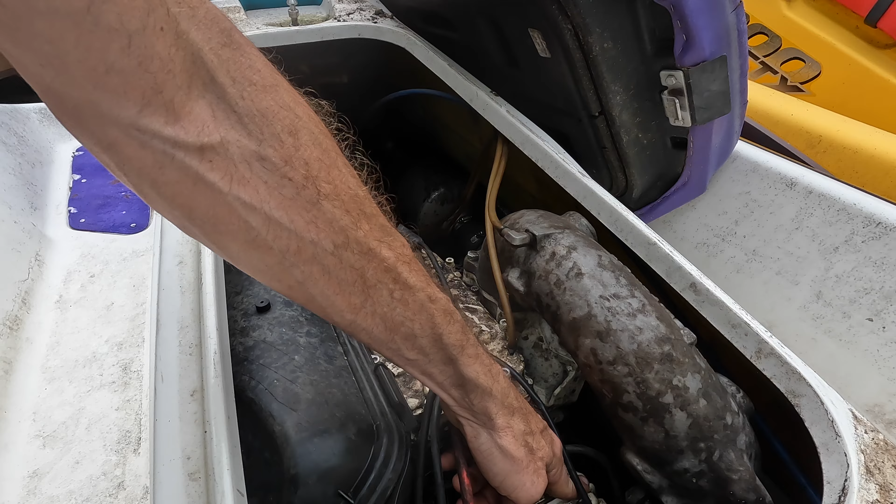From what I can tell, I just took this top off, and the person I bought it from said that there may be a stator issue, and they left this off. There are 8 screws or 8 bolts, which I found, which is good. This was taken off, and that's all the diagnosis that I believe has ever been done on this.

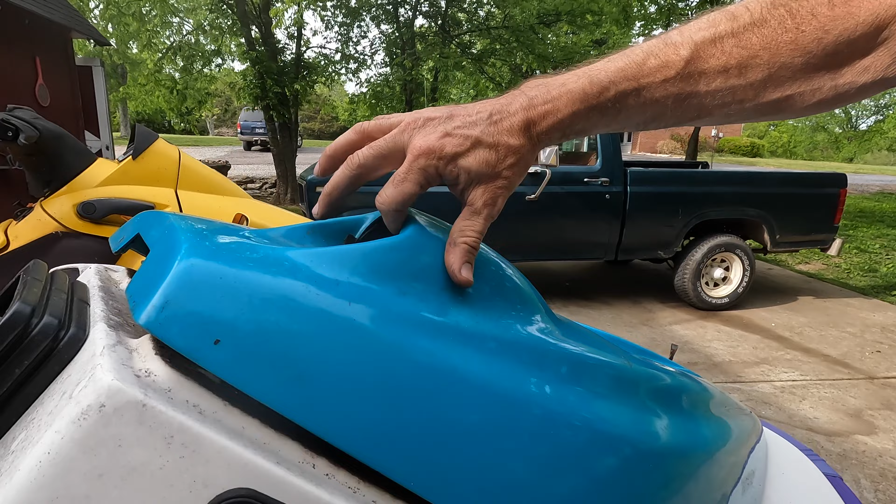But these look pretty rusted right here. I don't know if this top was left open and they rusted. Up here, I don't know what this is, but where you're missing the padding, this looks like the kill switch, the start switch, and this is stuck on there too. So it seems to be in kind of rough shape. There's the bolts, and these pads here, obviously pretty rough too. This is your oil fill on this one.

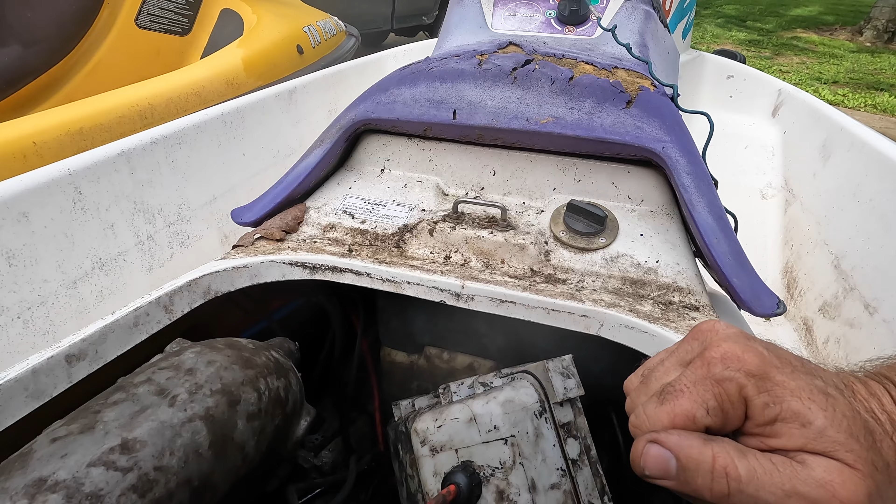So what I'm going to do is take a look at this carb for sure. But maybe I'll see if I can get a battery in here, at least turn it over. If I can get the engine turning over, I'll check out the oil lines, see how those look. They always seem to rot out.

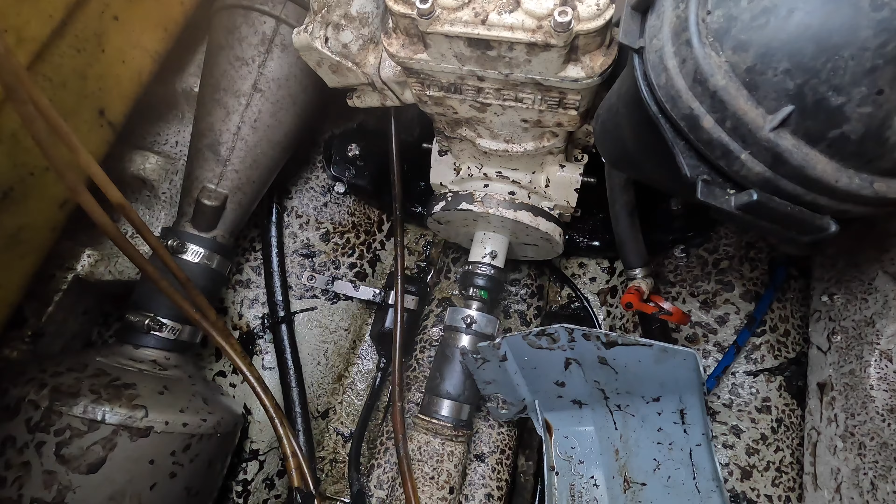Let's see if we can pull some of this out while we're looking at it. Where are the oil lines? It looks like fuel right there, looks like a fuel filter. That's not an oil line. I bet that's in one big oil line. Okay, so I think I need to take this carb out, yeah, see there's some oil lines going in there. I bet those need to be replaced. Almost guarantee it. Probably a good idea to do regardless.

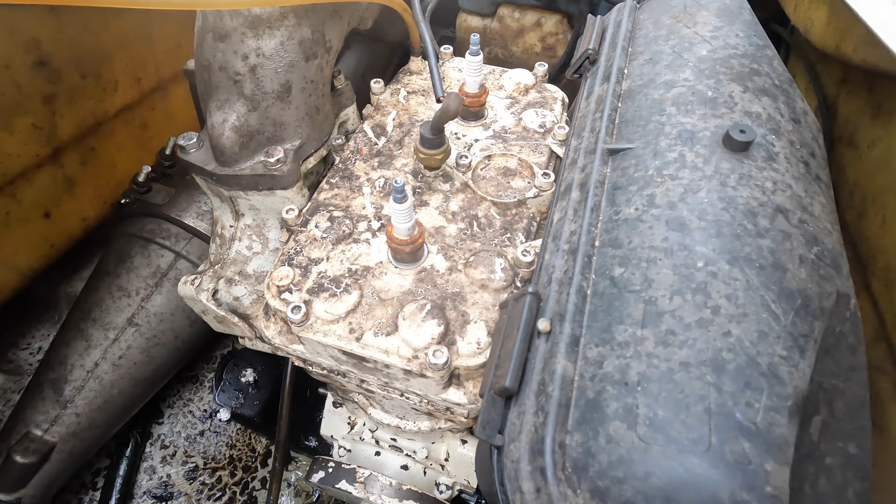All right, let's find a battery, throw it in here and see if we can get some action out of it. All right, I got a battery in here. I don't know where this electrical box is supposed to go though, it just sits in here or something. Anyway, for now I'm gonna leave this off.

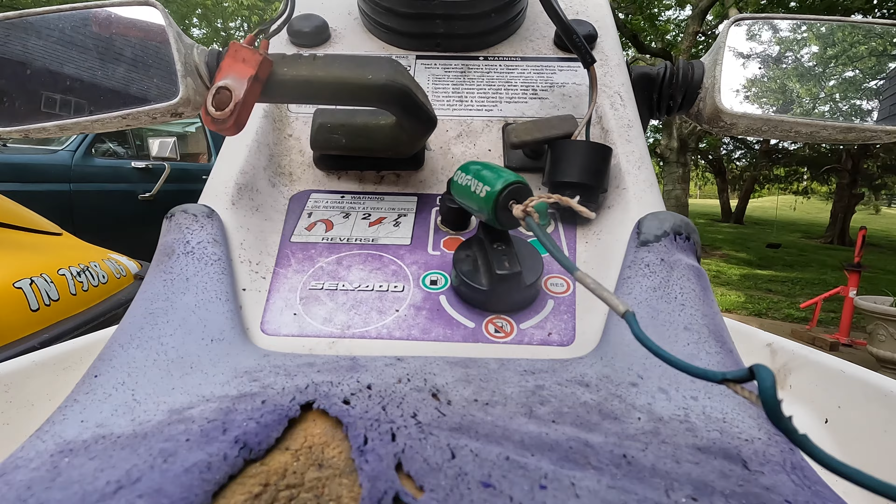Well, all right, let's see, we got a key in here. Let's see if we can turn this over. Do we have a key? Is this the key? Turn on reserve. Well, let's just leave it off, let's just hit that. Oh well, there we go. Oh yeah. Kablamo. Sweet. Guess we don't need no key.

All right, so now we just got to check for spark, see if it really is a stator issue, or if maybe we just need some spark plugs, or a fuse, or who knows.

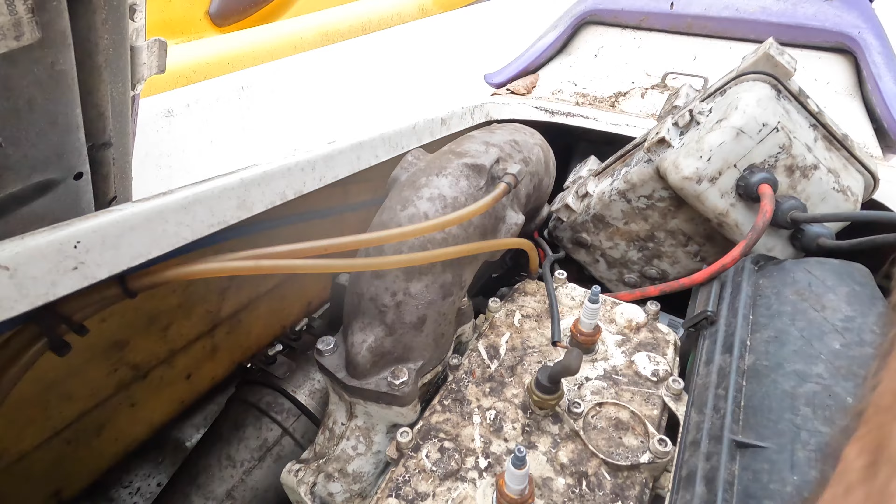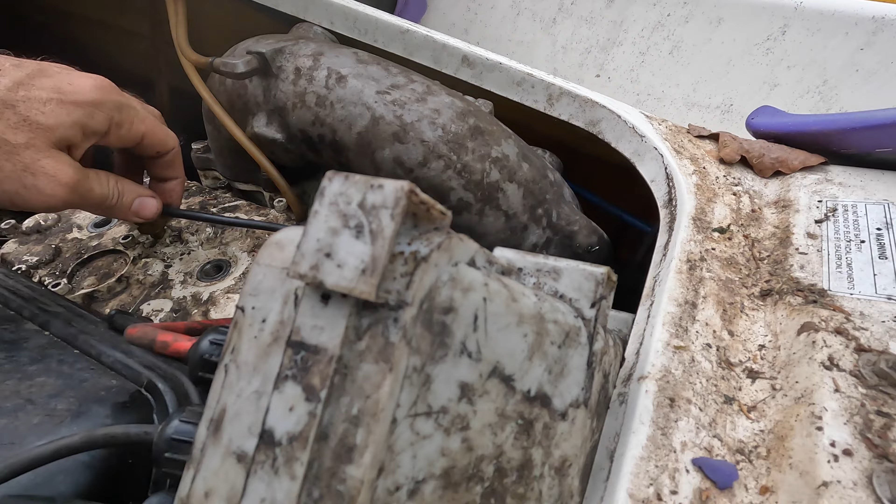Oh well, they don't look too bad. Let's do the old see-if-this-is-sparking trick. Getting any spark? I think I want to check a fuse before I check the stator.

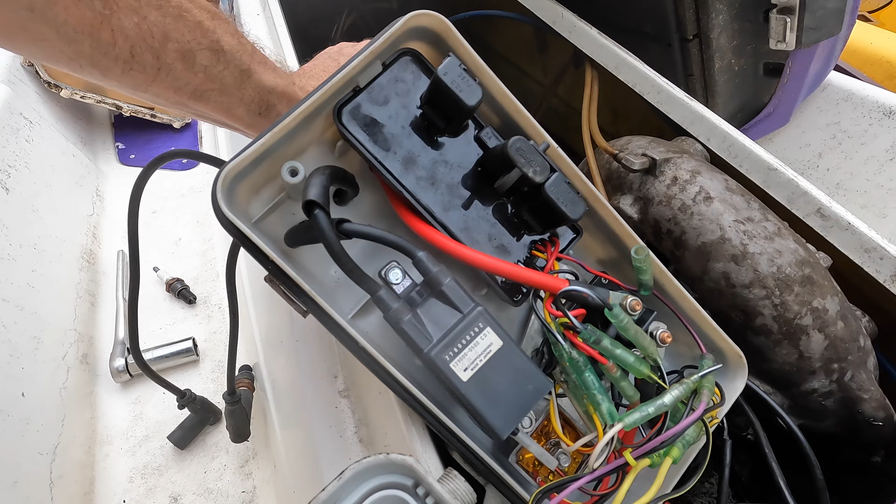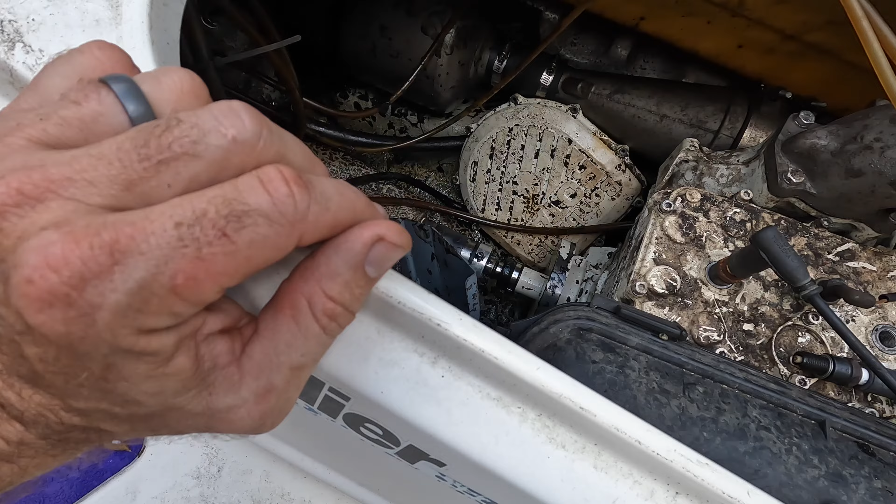I've checked these 2 main fuses and they both look fine, so I think the issue might be with the stator or the magneto. I'm going to see if I can get to it down here, maybe clean off the tips to it, but let's try to do that next.

I already have the cover off this compartment. That looks like somebody's been trying to loosen that nut right there. All right, let's get this battery out of here, let's see if we can loosen that nut.

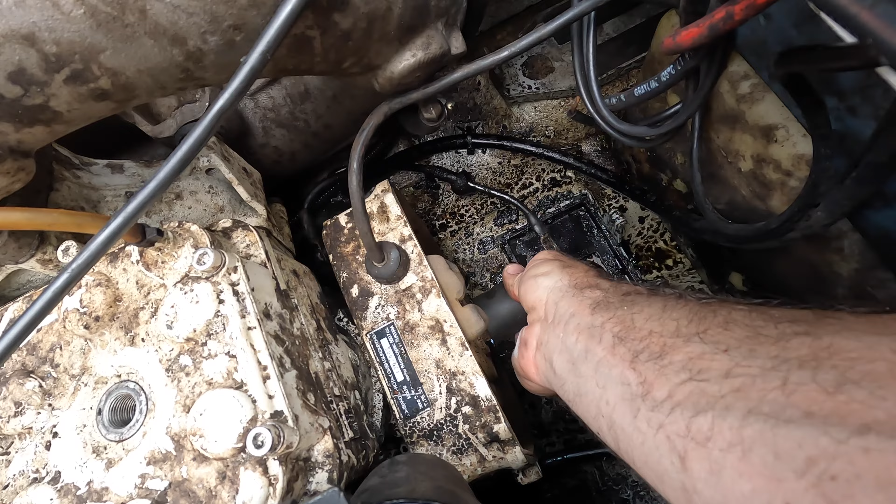I might have to hold the engine on this side. I believe they do make a special tool for getting that off, but I do not have that, so let's see what we can do. It's going to be a 30 millimeter socket.

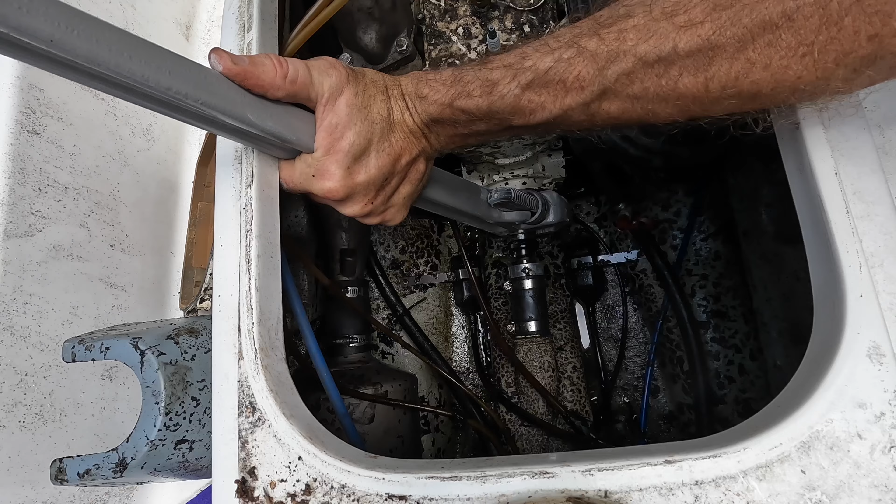Get this on here to hold it. I think I'm going to have to hold it this way without trying to damage this. All right, oh wait, it's grabbing now. Hold on, okay, it's grabbing. All right.

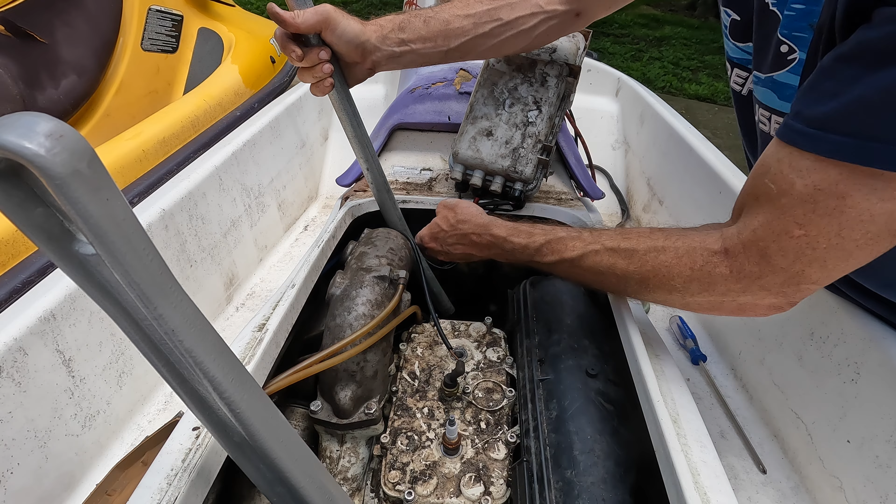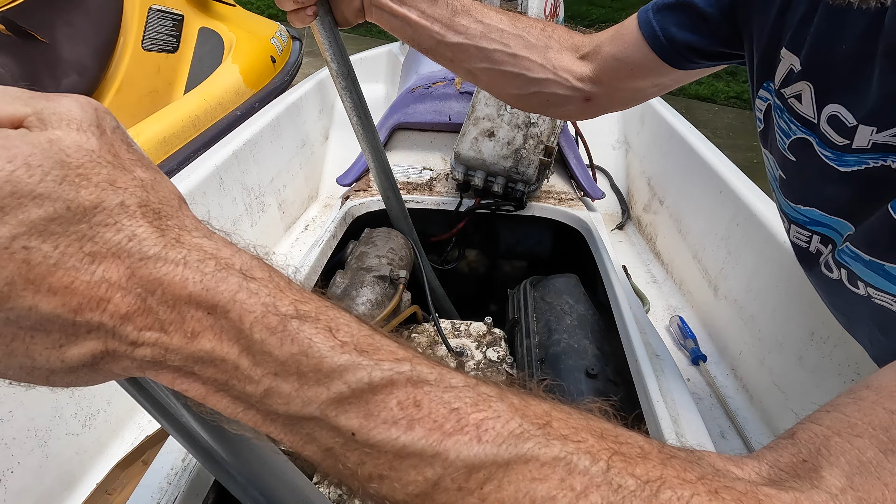All right, let's see if I can loosen this. Come on. Am I going the right way? That's the question, is it reverse threaded? Is it reverse threaded? I don't think it should be, right? Come on, I'm putting pretty good pressure on this. Maybe that'll help break some of the Loctite on there.

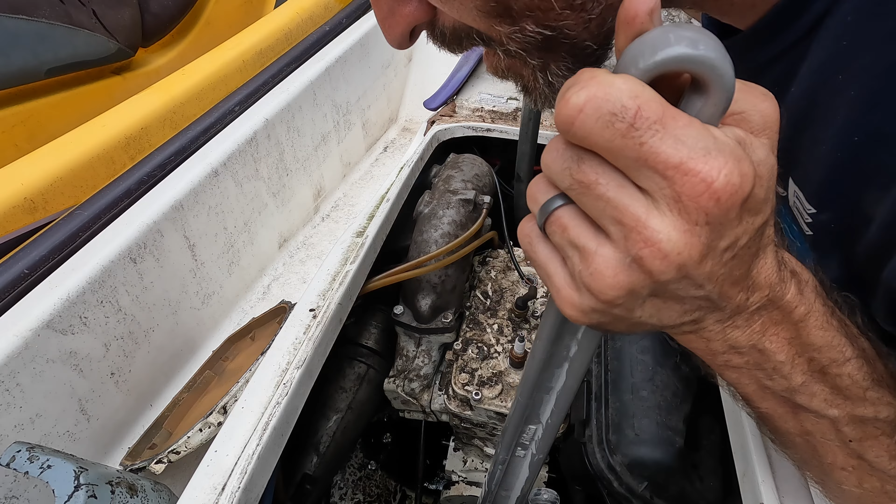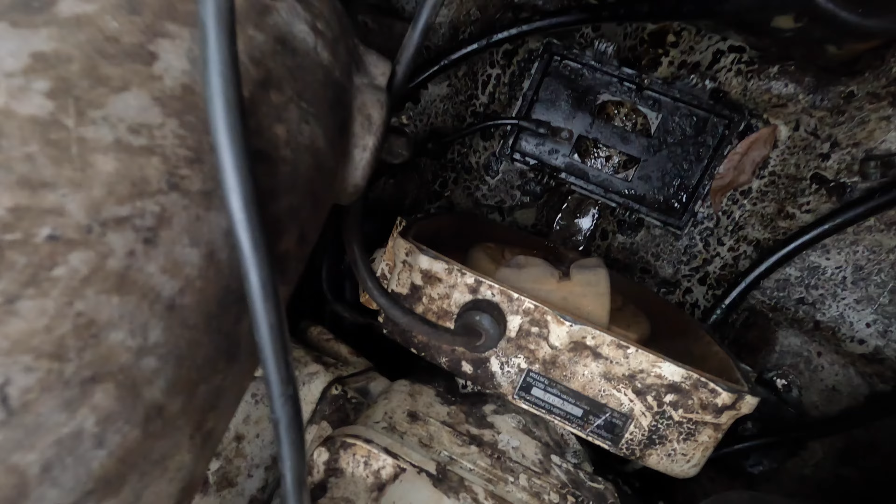All right, it's grabbing. Oh, I got it, I think. Yes. Did it. Oh, it's hot still. All right, okay. That's not the hardest part though, I still think we got to pop that off somehow.

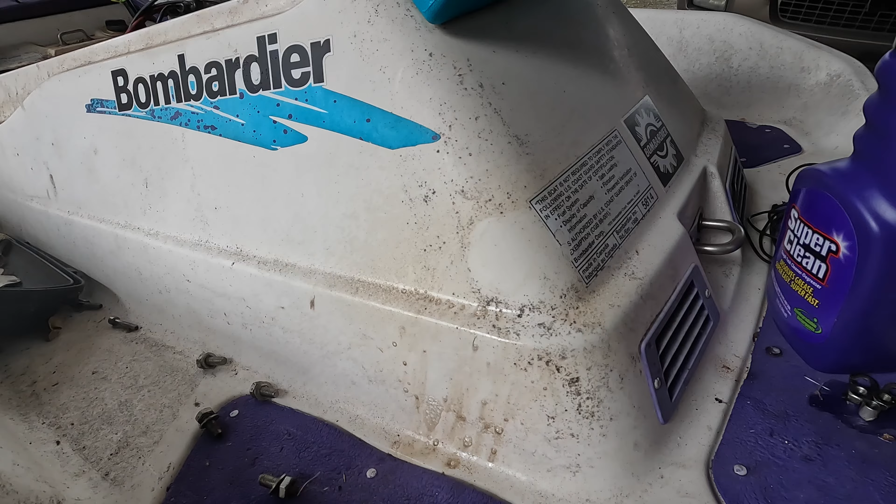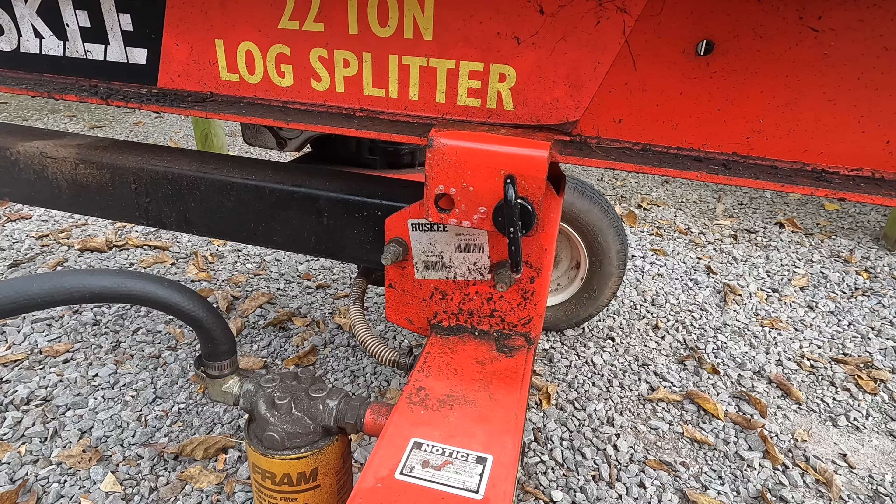Let's find something dirty to try this out with. Let's try this on this mildew here. It makes quick work of that. Oh man, look at all this grease and grime here, doesn't seem to have a problem with that. On the back of the can, it shows brakes, grills, engines, tools, driveways, outdoor furniture, marine kitchens, bathrooms, stainless steel. I can do this on my stainless steel grill, maybe I'll give that a shot. Oh man, this grill is nasty.

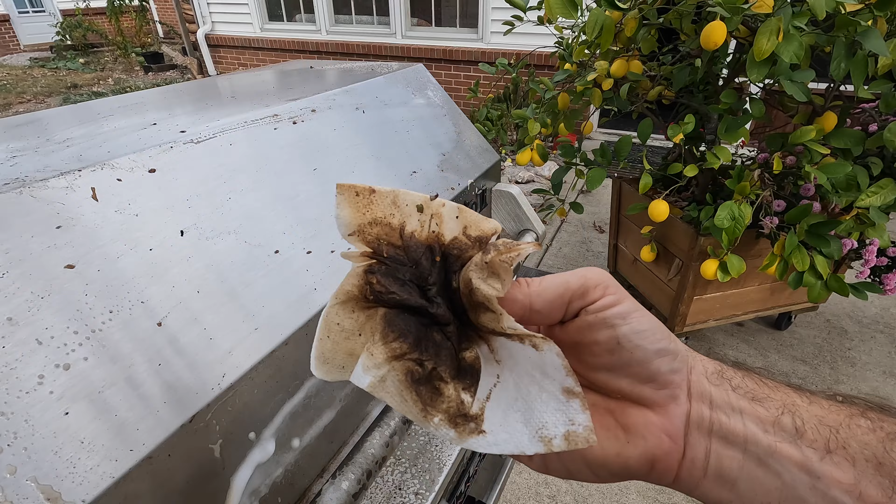I need to get more paper towels. That stuff's working pretty well.

That's really not a bad first pass. Some of this stuff is sap from the tree that I got to pick up, but I did a pretty good job for a real quick first pass.

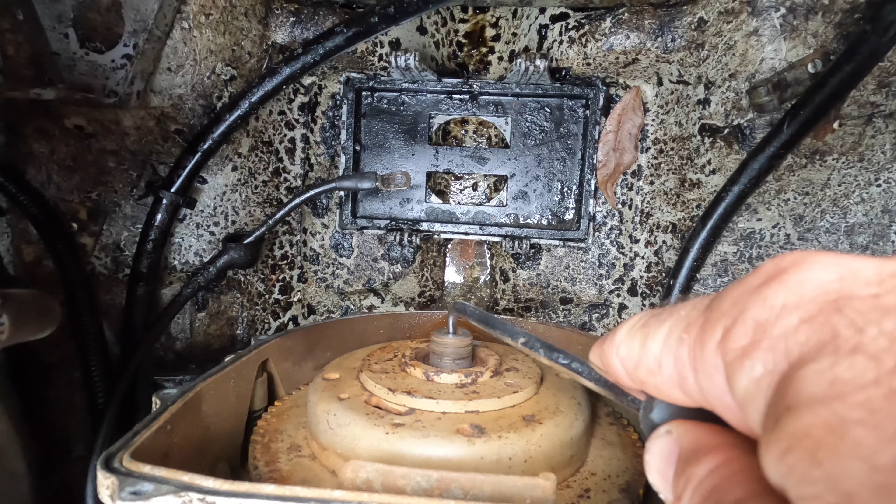Okay, I think in order to get this off, we need to punch this in here. Maybe it'll push this out. I think that's the way to do that.

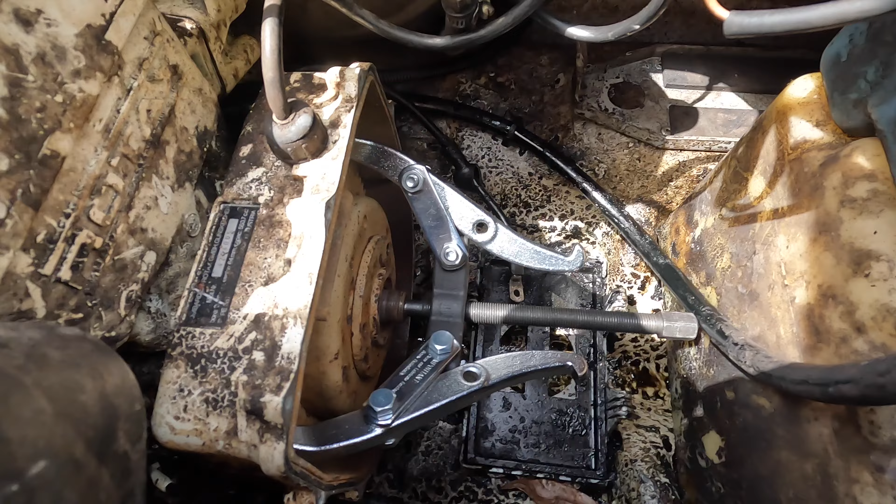I really don't want to take this engine out if I don't have to. So I rented this puller at O'Reilly's, and I was able to get 2 of the puller legs on this flywheel here. The third one, I can't get it on there. I'm hoping that'll give me enough grab to pull it out. Let's turn this and see if I can pull this off.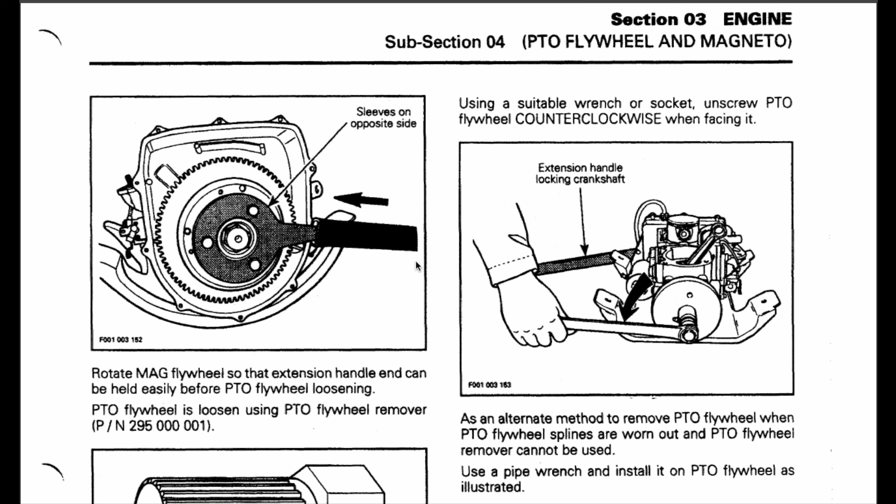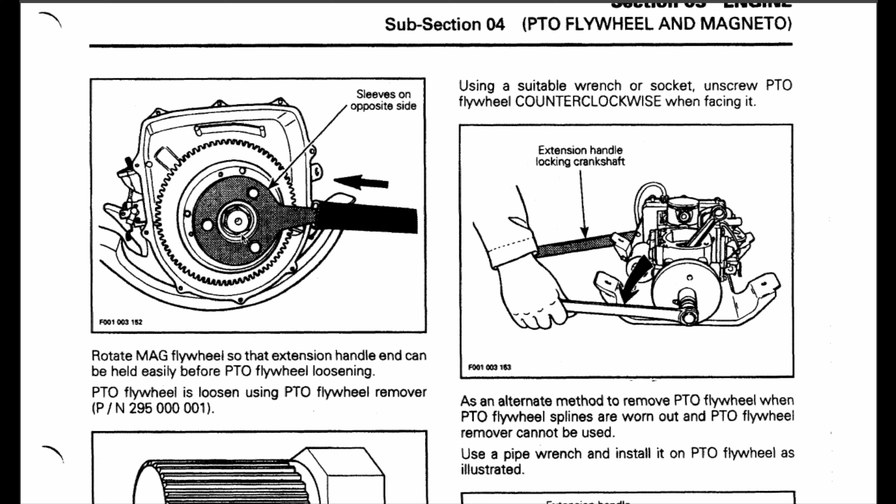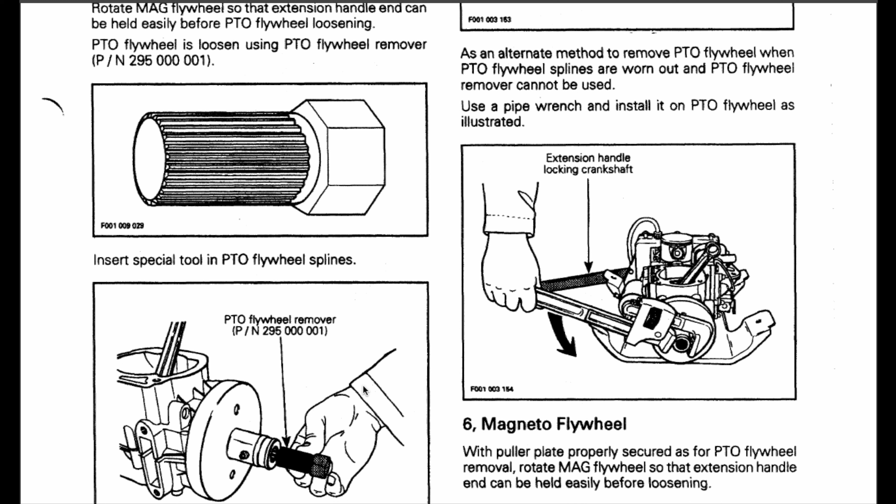The SeaDoo manual here is from 1994, so I think this is the right one. I'm looking at this page here. There's a special tool to attach to the flywheel, which holds it in place, and then there's another special tool which you put on the other side of the flywheel. This is the back side of the engine to basically lock it so that you can unbolt the nut.

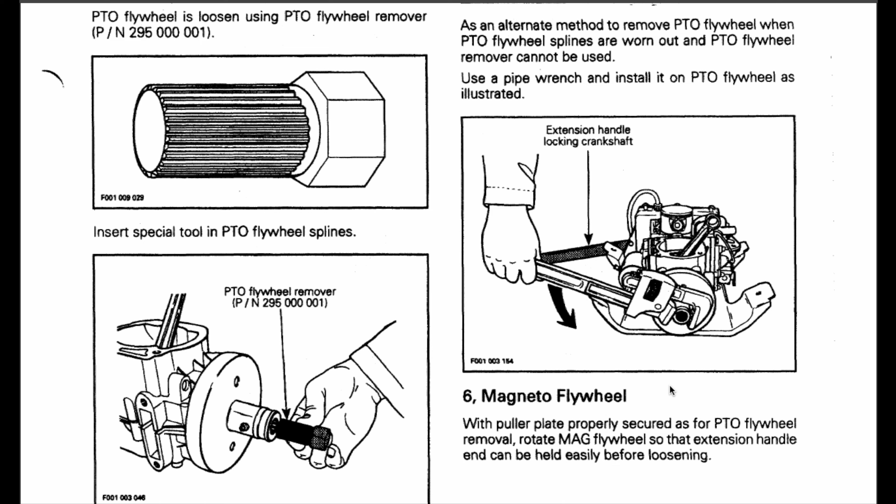I don't have this tool, so I'm going to use the alternate method, which is using this pipe wrench here to hold it in place. So I've done that already. I've got the nut off. But now we need to get this flywheel off.

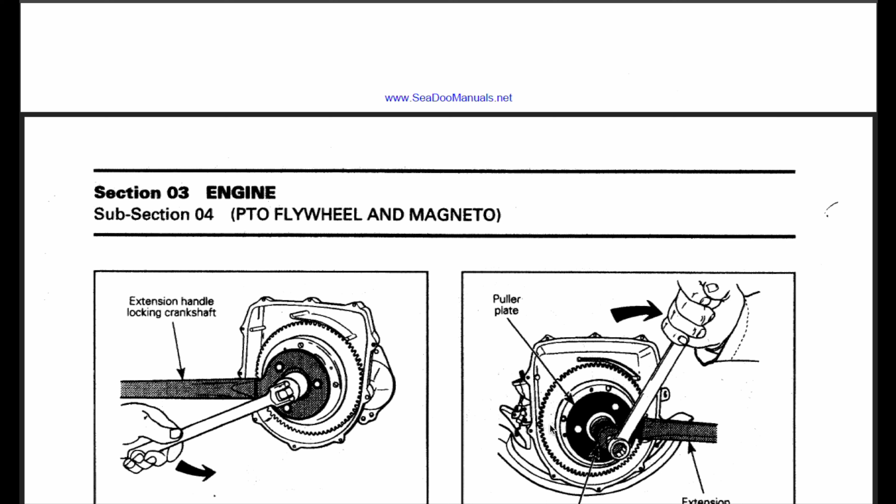And it looks like there's another special tool here. It's a puller is what they're calling it. Fully thread on the puller into puller plate. Oh, I think I get it. So the puller goes inside this plate here. Okay, so the puller goes in the plate, which pushes against it and pulls it out.

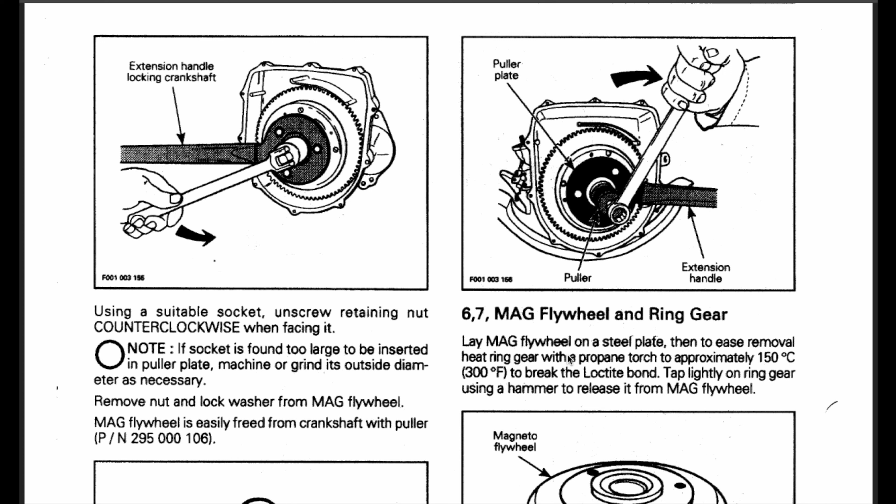Okay, I'm starting to understand here. So the puller threads onto this plate, which pulls the flywheel off. And then you heat this up with a propane torch to release the Loctite, and then tap lightly on the ring gear using a hammer to release it. And that's what will come off.

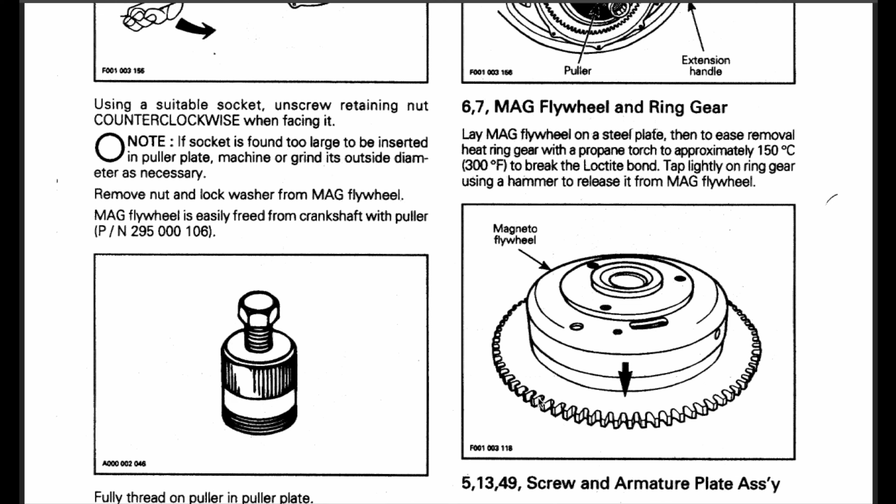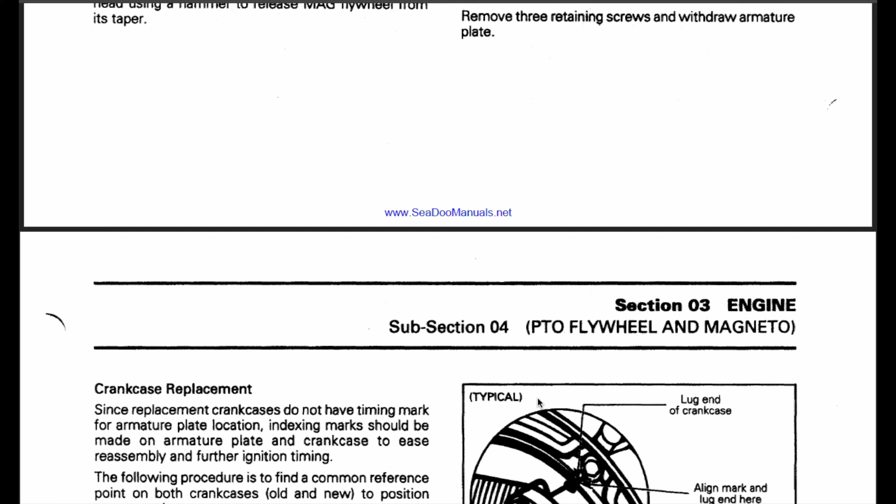Okay, I thought that was kind of what I was doing with the other puller. Huh. Didn't seem to budge though. And once we get that off, then we should have access to the magneto.

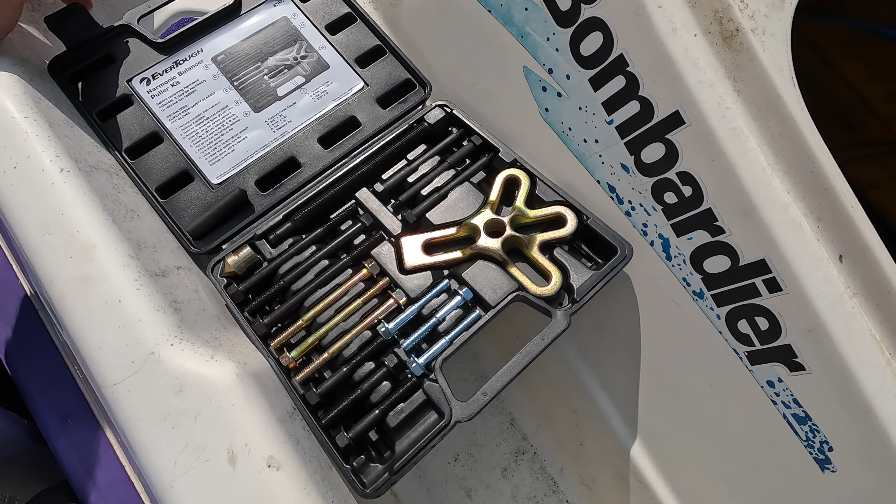All right, I went to O'Reilly's and swapped out the pullers that I had for another one. This is a harmonic balancer puller kit. It's a little bit smaller. I'm hoping this one will work.

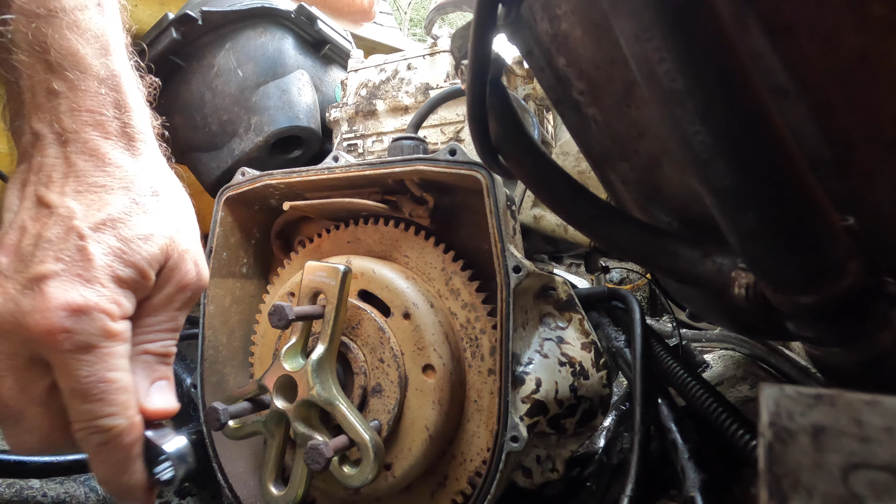All right, I'm not too confident this is going to work, but I've got it on there. At least it's not quite centered. I'm going to try to center it up a little bit more and then see if I can unscrew this. This is not budging. Shouldn't be this hard.

I think I might just have to pull this engine. I am not getting this off. Oh, so I've gone ahead and pulled this engine out. I didn't take you through all that because it's just 4 bolts there. And really, there's the disconnect here.

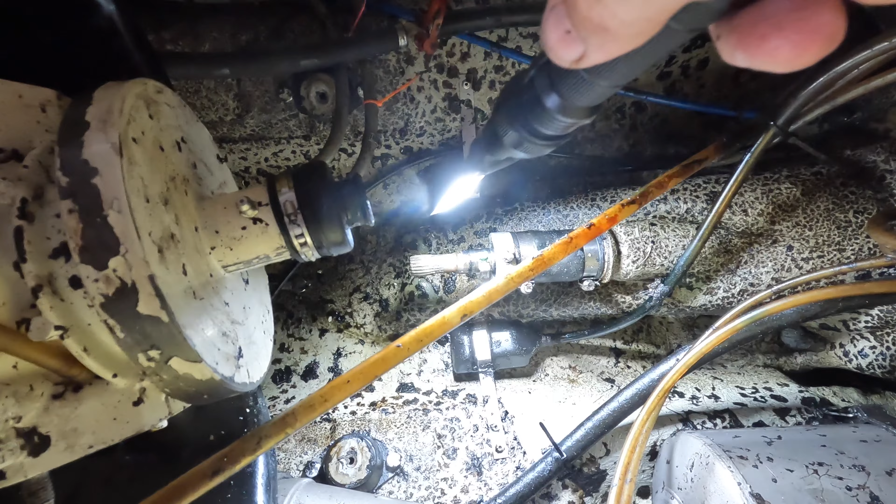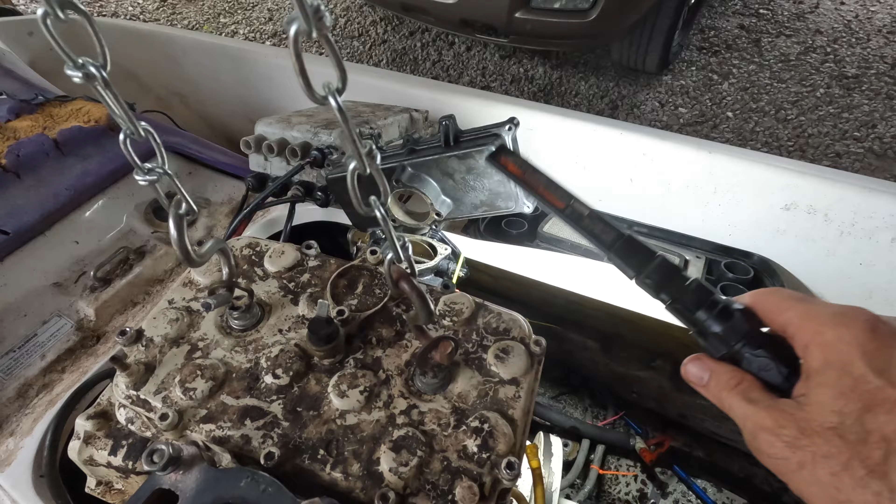There's not a clutch coupler like there was in the Kawasaki. You basically just need to take off this little ring right here, this clip that holds on this rubber boot right around the shaft here, and then it just decouples here. I did loosen that off to make it easier. Maybe I didn't have to take that off, but yeah, here's another line I got to disconnect as well.

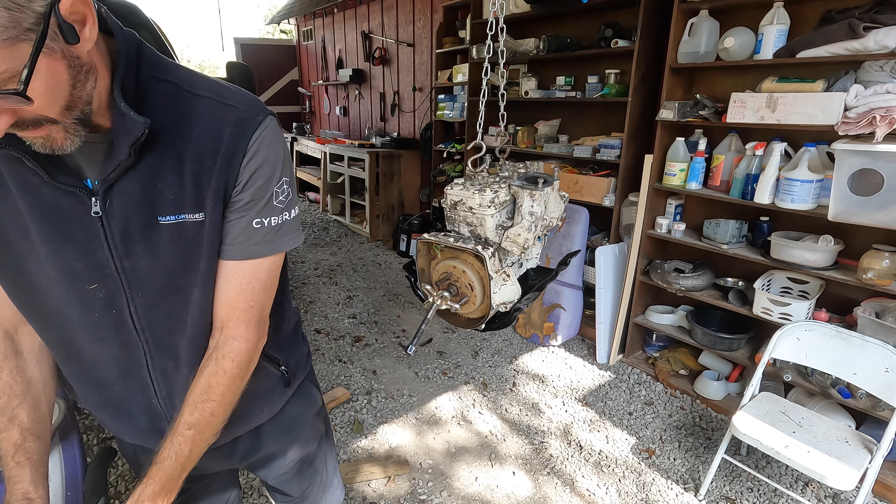So I picked up this puller set again, and now that I've got the engine out of here, I think I can put my impact on this and hopefully get this loose.

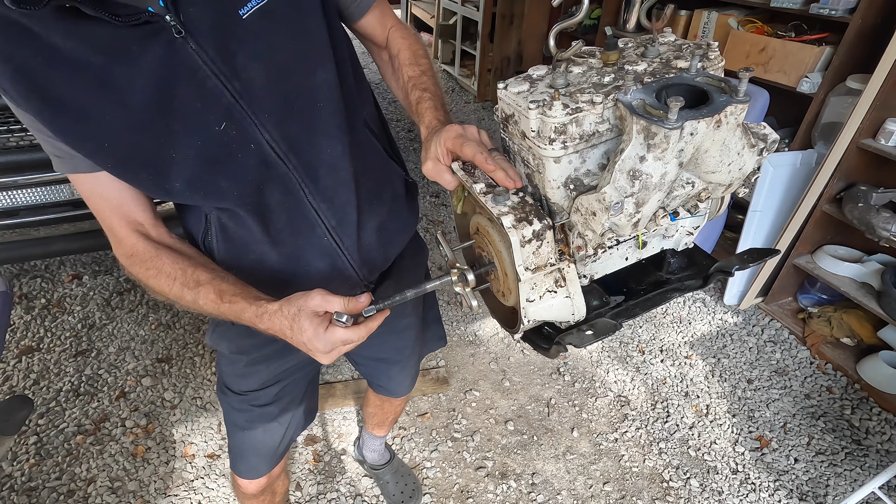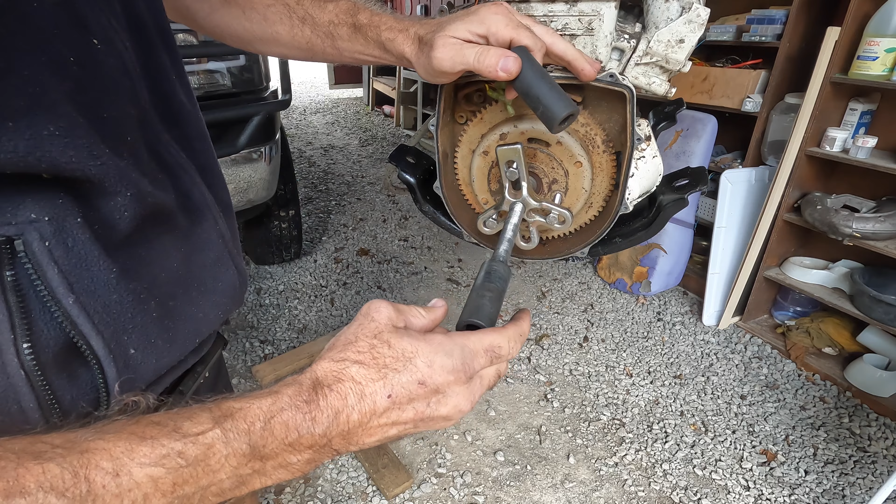That's good. 19. Okay. A moment of truth.

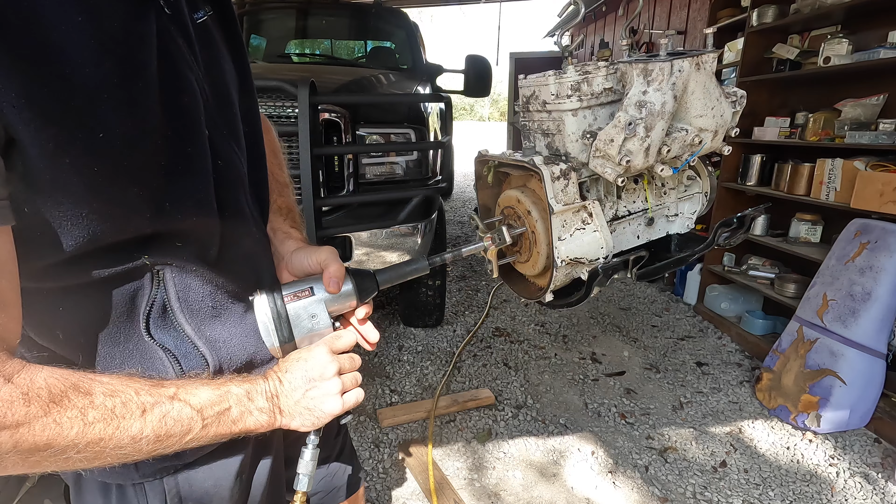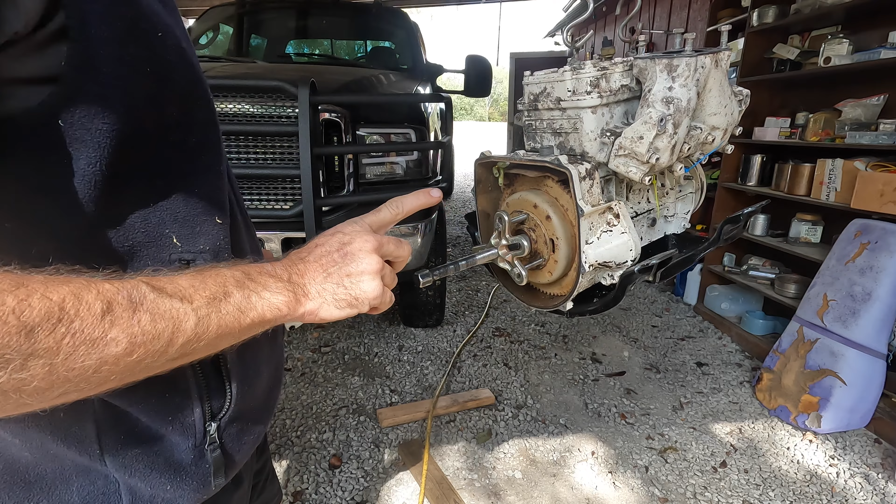Nothing. Sound like the air compressor was turned down. I'm going to turn up the pressure on the air compressor. Do a little more. All right.

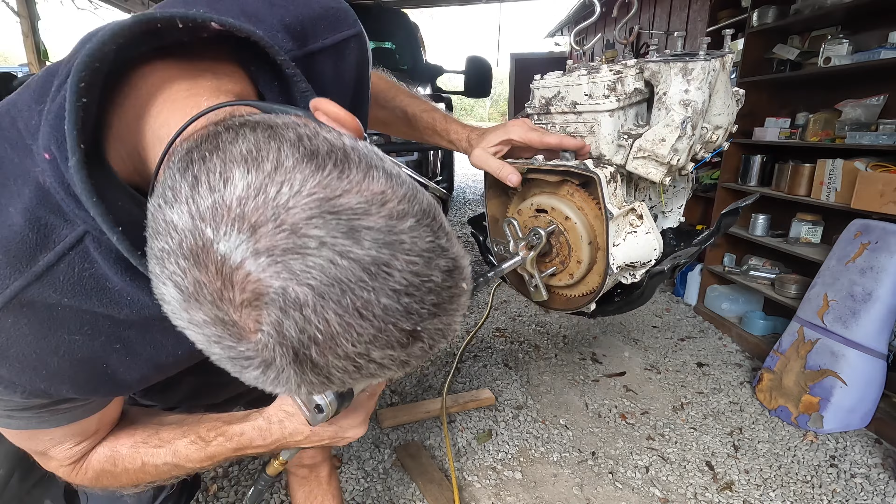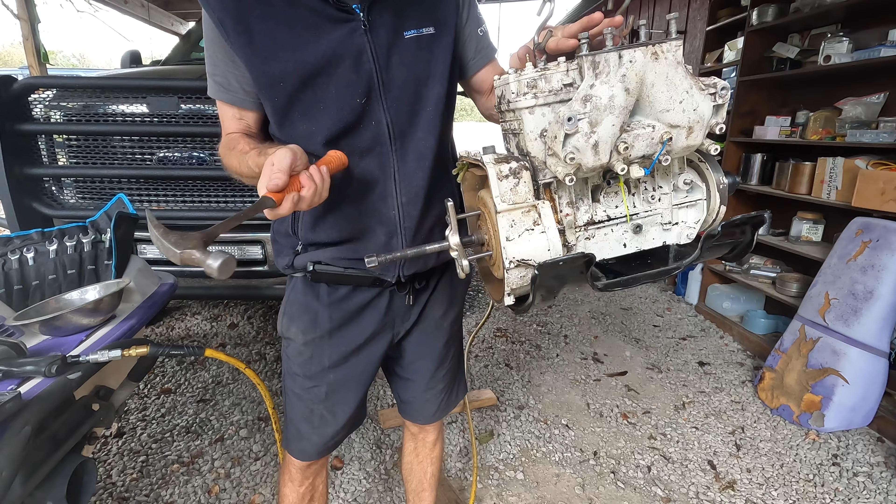Is that not? Come look, I'm bending this. Bending that, bending that. I don't know how to get this off. Do not know.

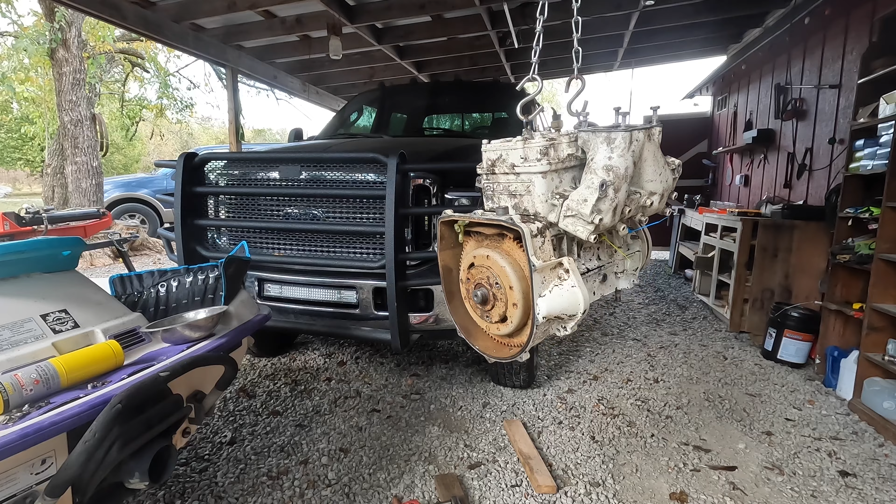Absolutely nothing. All right, listen, I'm done with this machine. I can't get this off. I think all I have is a stator magneto issue that I got to get off and replaced. I mean, it's probably a $20 part. But I've given up. I'm giving up. I've spent too much time on this. If any of you people know how to get this off, maybe I don't have the right tool. There is no clip on here keeping it on. I've tried heat, I've tried banging it or pressing it, whatever.

It just won't come off. I don't know how to do it. Let me know how to get this thing off. Otherwise, I'm gonna put it back in the machine and give it away to somebody. I'm just gonna have to end it here because I don't know what else to do. I'd love to get it on the water, try it out, put it back together, see how powerful this thing is. But can't do it, can't do it. I've met my limits, and so I'm done. I would really like some good comments on this.